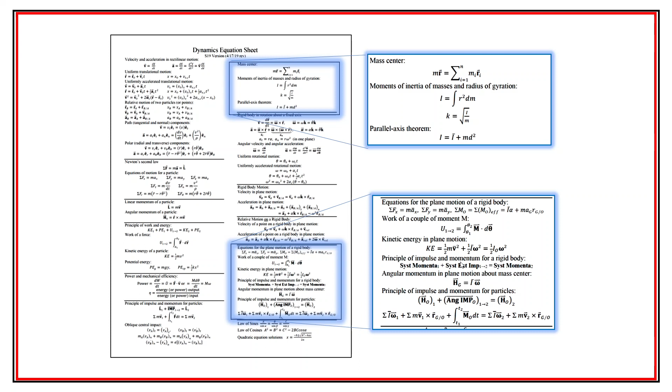And here's some representative problems. Ooh, look at this, there are a couple more. I don't know where that problem came from, but yeah, we can do that problem. From spring of 2017, spring of 2016: impulse and momentum, some more impulse and momentum, some work energy, some impulse momentum.

So we got any requests? We're taking a request today. Freebird is the answer when someone says we're taking a request. Go back to the circle. Go back to the circle. It's like one of the first questions.

Wait, so is it not cumulative, or? Well, it's kind of cumulative, to the extent that many of these things have overlap.

It's not the circle one. Do this one, not only this one. No, you're talking about the circle one? Yeah, this is not the circle one. But there's not many circles on this one. Yeah, the one with the drum rolling down, that was the circle I was talking about. But this is also, I think it's literally the next one. I'm sorry, no? Yeah, that was the circle one.

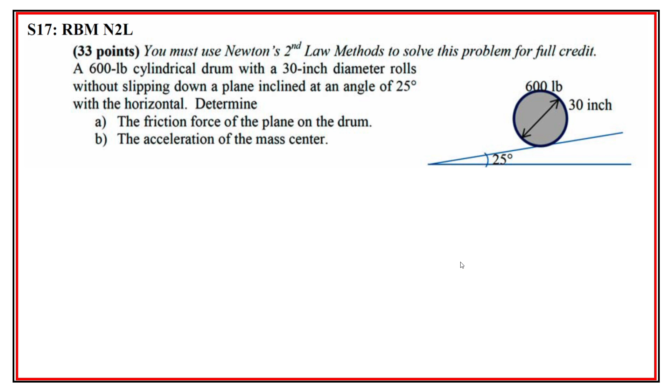Because it has stuff from, like, are you saying because these topics have stuff from everything? So some of these topics, or some of these problems, inevitably have something related to others, but it is cumulative in the sense that all of these things are related to each other. But I probably won't ask a specific question like that, except that I should also mention, and I've said this before, it's likely you'll see a rigid body acceleration problem from exam 3, a problem like that, and then might ask for ICR, just because it's something difficult and it's a measure of mastery of the topics.

So, but I'm also just providing problems I've done before, or that have been exam problems before, from Coast Guard. We actually had 5 exams there, including the final exam. Oh no, actually we might have 6, including the final exam. We did a short one, a half exam on vibrations. We had a lot of classes, almost 45 classes throughout the semester when you have 3 days a week. There's a lot more classes.

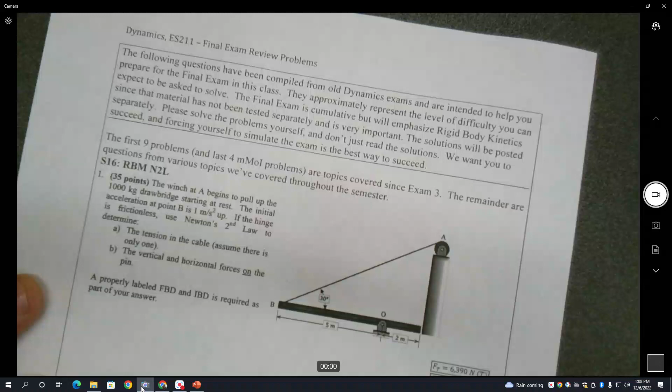Not sure if all of this is... there's a lot of words up here. Blah, blah, blah, blah, blah, blah, blah. Anybody ever read all that? When you have too many words, nobody reads it. So that's what I am with greeting cards, if somebody has too many words, I just don't read it.

So, we could start off, we got a couple of choices, because this is pinned right here.

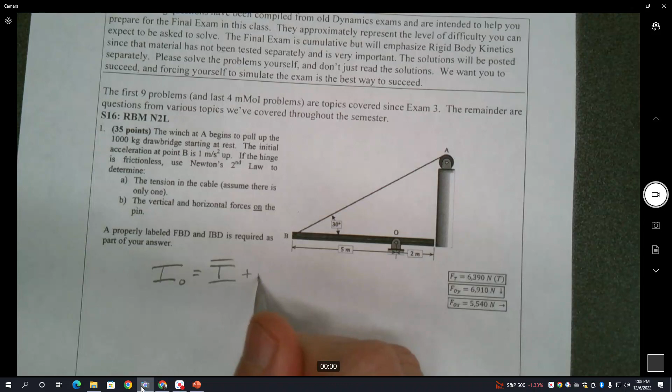So I might go for the moment of inertia about O, which would be different, I didn't bring my calculator, would be different from what the posted solution is gonna be. But it's one of our choices, so I would take the moment of inertia about O by taking the moment of inertia of the whole thing and then moving it the distance from the center of mass here to O, right? So I might go R center of mass to O squared. Could write that a bunch of different ways.

And if we have equation sheets, which if you don't happen to have one with you and you want one, I think I have a few.

Not a bad idea to grab. All right, so here we can, I'm gonna go ahead and use a long slender bar. It looks slender enough to me, but if you want to use a flat plate, you could.

But if you're around this axis right here, you end up getting the same 1/12 mb squared versus 1/12 ml squared. They all end up the same thing right there.

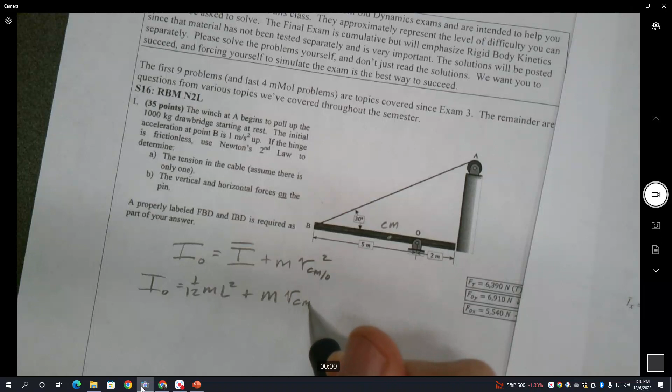1/12 ml squared plus m, and now this distance, well, let's just keep it this way for now. It's nice that we have this in SI units, so we have the total length is 7 meters, and we're going to take 1000, and now this distance we have to do a little bit of thinking here. So we have 3.5 minus 2, right? So that would be 1.5 that we're going to move the thing? Yeah, sure.

So I'll take 49 divided by 12, and I can add it to 1.5 squared. Take a shortcut, multiply by 1000, and get 6,333 kilogram meters squared.

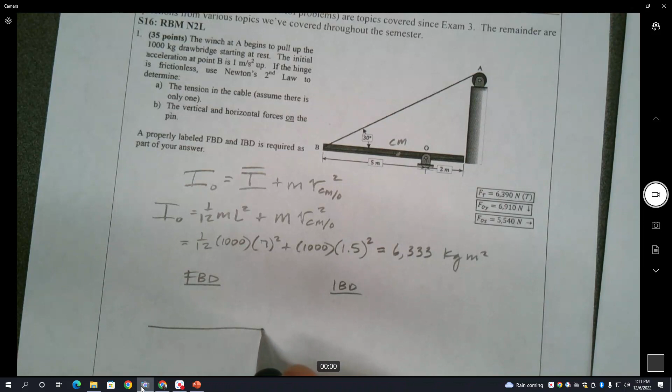And now I'll do my FBD and kinetic diagram. Let's see the forces acting on this. We're going to have the pin forces, so I'll go Rx and Ry, and then the force due to the tension. We'll have the weight of this.

I don't know, it's at 30 degrees. And then on here, I guess I'll go ahead and do this right here. We're going to have the mass times acceleration, ma, I guess it'll be the center of mass. We're also going to have the I of O times alpha.

So if I take the sum of the moments about O, in this case I can write this thing out because it's a pinned problem. I can write that. I would otherwise write the effective moments, but because it's pinned, it's a special case where we can write that. I'm going to declare counterclockwise as positive.

So I'm going to get the tension in the cable, but it's only going to be the perpendicular portion right there. So it'll be Ft, it'll be negative because it's going clockwise - which I could have probably saved myself some time by making it clockwise positive instead. So now it's going to be the sine of 30 degrees.

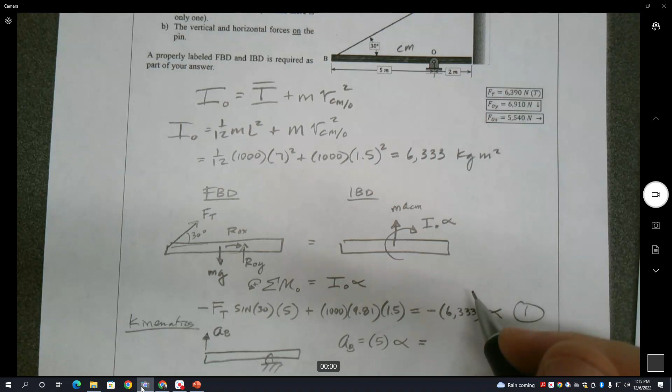Which we know we were told is 1 meter per second squared. So alpha is 0.5 or 0.2, right? No, right? Yes, 0.2. Are we looking for the velocity? We were given the acceleration, right here. What's the next one? I think it's... I was thinking it's velocity. So it's going to be radians per second squared.

While we're here, we might want to get the acceleration of the center of mass, which is just 1.5 times the alpha, or 0.2. So that's a useful thing for us to get 0.3. Yeah, 1.5 times 0.2, yeah, 0.3 meters per second squared.

Good news, now we go back up to equation 1 and find what the tension is going to be. So that should be, let's see, this comes back over here to add with this, and this goes over there. All right, so we're good with that. So we have the 6,333 times 0.2, and we're going to add to it the 1000 times 9.81 times 1.5.

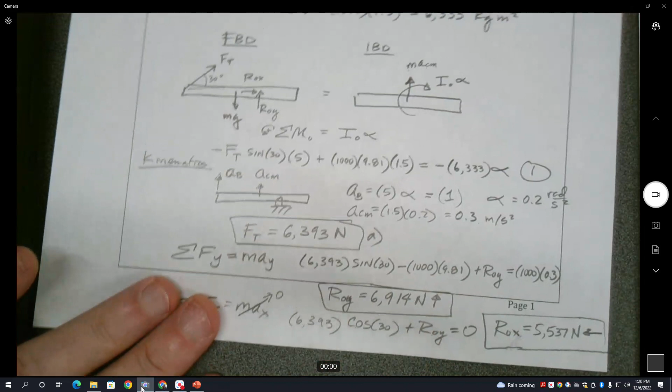Tom Brady wins too many games. We talked about that when we were in Cancun. I heard some of it. Tom Brady is the worst, I dislike it. Statistically he's pretty good. Statistically he wins too much, personally I don't like it. I liked him more when he was an underdog, then he became an overdog and I didn't like him. He just needs to retire. It's over. Yeah, apparently it's not over, he can do any damn thing he wants. He's gonna figure out a way to go to the Super Bowl. I did enjoy watching the Manning Bowl, I mean the Manning stuff, they're always fun to watch. That's the best way to watch football, and the way I want to watch it all the time, the Mannings talking over it, or just regular people talking and joking around. The Tony Romo broadcasts are always great, he's better than... I forgot his name, the other Dallas Cowboy announcer, Troy Aikman. I don't like Troy. Sorry, if this is being recorded and Troy happens to be watching Dynamics videos, I would hurt his feelings. I don't think we're gonna hurt his feelings. You don't think so? I think he could. Yeah, I think he's above it. Yeah, I agree with you.

All right, so I want to say, see this one, you alluded to this, this is the circle one. This is what I was referring to the first time around. I got you, I hear you.

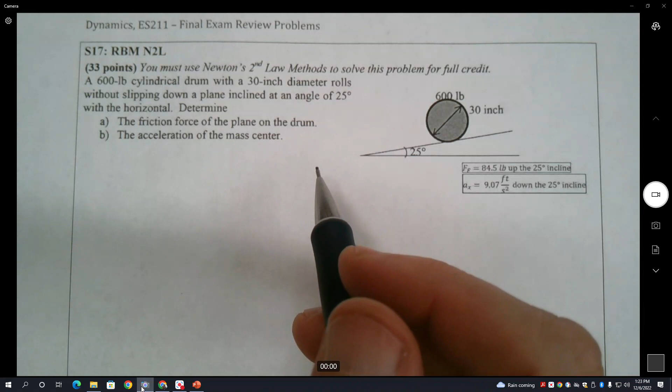I will grade your last 3 homework assignments. I recognized that, I was looking at the other day like, son of a... I thought, see, they were over to the side, and it only scrolled over so far. I was like, oh good, look, I'm ahead. No, I'm not. All right, so you must use Newton's second law. Let's see, I didn't make this problem, because mine would have been my graphic would have looked so much better. Sorry, Alicia.

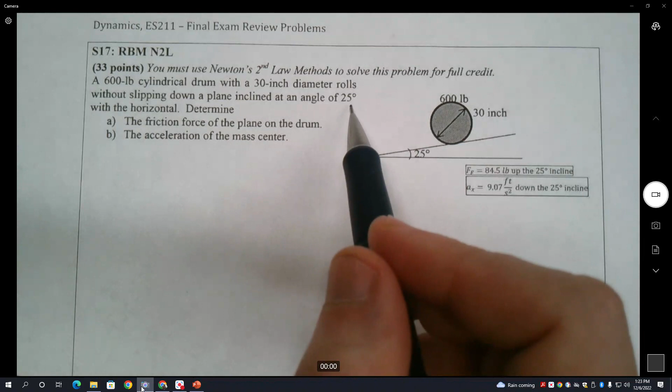Methods to solve this problem for full credit: A 600-pound cylindrical drum with a 30-inch diameter rolls without slipping down a plane inclined at 25 degrees. So the without slipping part is important. We want to determine the friction force of the plane on the drum and the acceleration of the center of mass. So first thing I'm going to do is get the moment of inertia of the drum. Did they not give us a radius of gyration? This is a cylindrical drum, right, so we need to look this up. It doesn't matter if it's a cylinder or a disc, either way we're going to have 1/2 m r squared.

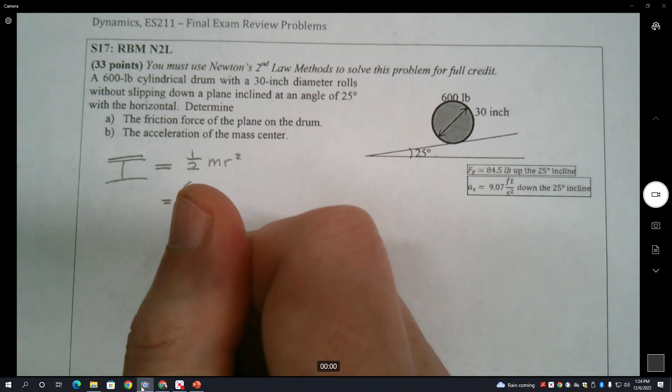And we're using our favorite US units. Oh boy. So we need 600 divided by 32.2. And the radius, this is the diameter, so we need 1/2 of it.

And need to turn it into feet. So 600, 32.2 divided by 2. And then take 15 divided by 12 and square it. And I think I get 14.56 slug feet squared.

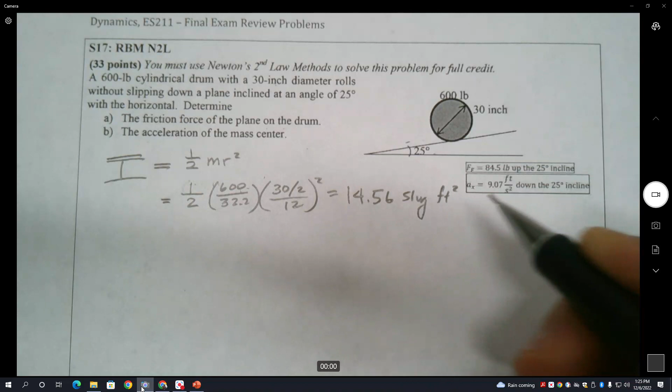Sure, somewhere. She always just leaves the things in there. It bothers me. Why'd you put it in there? I think she likes it because you can cancel the mass out. That's why she's doing that.

All right, so you see the solution, you see Dr. Garcia's solution. Oh, I get it, the mass. I like the numbers, but it's interesting that the things cancel out, but not that interesting. So, okay, I think we're ready for the FBD and IBD.

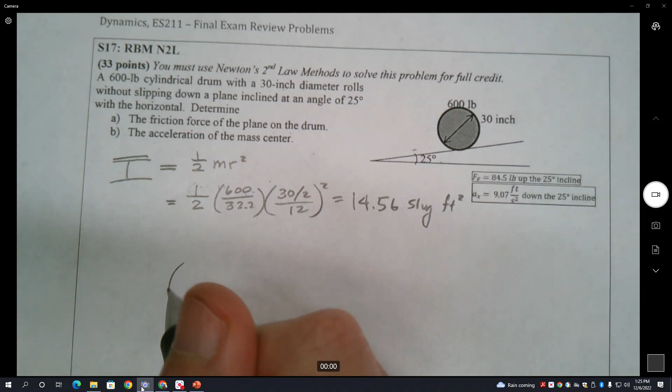It's 25 degrees. This doesn't quite look like 25 degrees. So let's see, something along those lines right there. So the weight's going to be acting downwards, so there's the weight.

The normal force is going to be in this direction. The friction force now, you have to ask the question: which way is it going to go? Is it going to go up the hill or down the hill? What do you think? Probably up. The friction is going to go up.

So yeah, okay, I hear what you're saying. So there, I agree, the friction force will be that way.

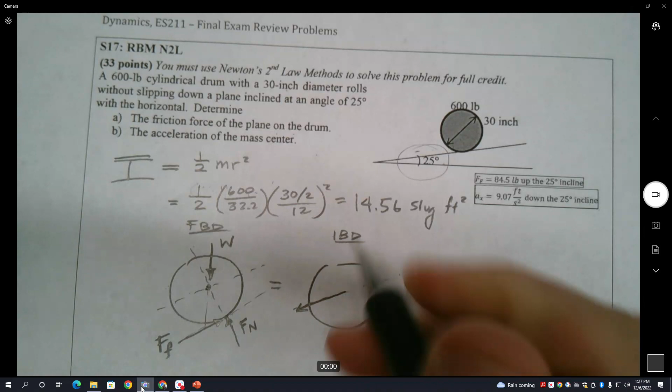You could think of the friction force as the thing that's making the drum rotate. If you took the moment about this spot right here, the normal force and the weight would have no influence on that drum. So it would have to be the friction force that's making it rotate down that way. So we're going to say it can only accelerate translationally down the slope that way, so we're going to have mass times acceleration there.

And we know that it's rolling as well, so we're going to have I alpha about the center.

So let's see, determine the friction force on the plane, the acceleration of the center of mass. I think what I want to do here is also take an x prime that way and a y prime that way, and notice that's moving there, so we can make the weight only in here.

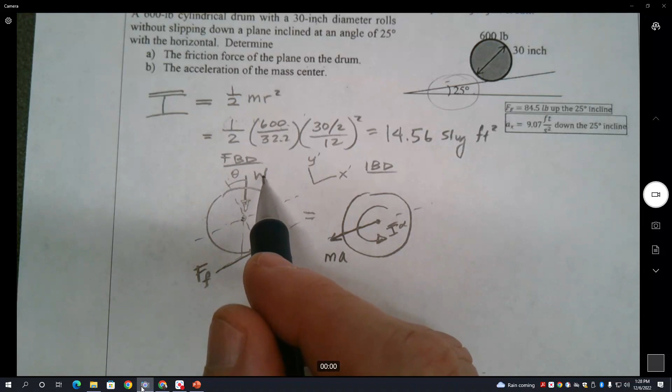We don't need the normal force for anything, so there's no reason to do anything in the y prime direction. Make sure that you recognize that this right here is not true in this case because it's without slipping.

This would only be true if it were slipping, right? So don't fall into that trap of turning your brain off and saying, hey, I recognize that variable. One hint is that it didn't include the coefficient of friction. If they'd been just a little meaner, it would have included the coefficient of friction to try to trick you. But then it wouldn't have said without slipping.

I agree with you, but some people don't read, like me, a lot of times. I don't like reading, there's too many words. I'm an engineer, you should read the greeting card though. That's frightening to do, especially if it rhymes, I'm not a fan of poetry. My daughter's trying to convince me. You don't even like Edgar Allan Poe? Not so much, I like a haiku, it's short. I really hate haikus. Haikus are nice, I don't get them. They're cool but they're kind of dumb. You're kind of dumb. We're digressing, are we? Get to it, I'm not here for your haiku critiques. I got you, we can talk about this later, a long conversation.

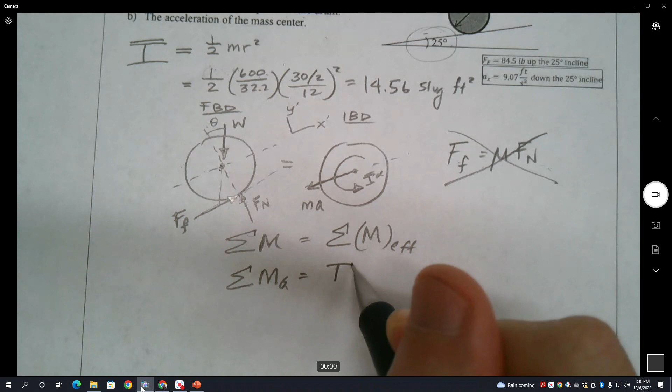So anyway, if we take the moment about the center of gravity, this was in translation and rotation, so we can't do it about the pinned type of thing. Most of the time we would do the sum of the moments about some point equal to the sum of the effective moments, but if we do it about the center of gravity, we're always going to be okay. So we can take it about G, equal to I alpha. So that's okay to say.

So looking at this, we're also going to take counterclockwise as positive. So we take this unknown friction force that we have right here, going in a positive direction, and we'll take the radius, so that's 30 divided by 2 divided by 12. There's nothing on the left-hand side here because we're taking moments about G. And so this is going through the center, so in terms of the effective moments, it doesn't do anything.

So what we're left with is I alpha, and we don't yet know alpha, so it's 14.56 alpha. We have to put a pin in this one for the time being because we don't know it. So we'll call that equation 1.

Then we take the sum of the forces in the x prime direction equal to mass times acceleration in the x prime direction. The forces in the x direction, we'll call positive coming up right here. We have this friction force, which we still don't know. Fn goes away, it's not there. But we do have a negative weight, and it's going to be the weight of this thing, which is 600 pounds, times the sine of 25 degrees.

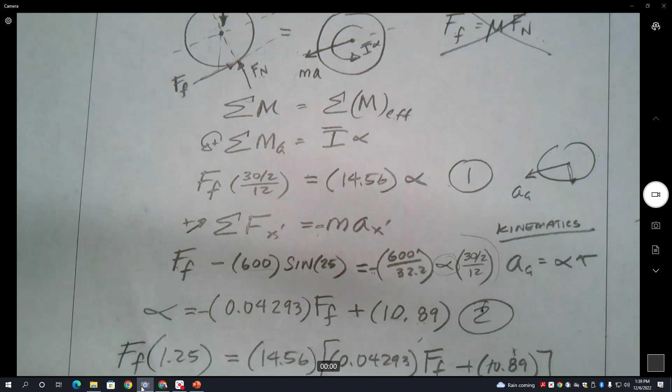84.56 pounds, which is what, oh, I'm sorry, slide. And then from this, we could go back into, well, we could go to this equation, I guess, right here. Yeah, that's as easy as anything.

To go, alpha is equal to 0.04293 times our 84.56, plus 10.89. Bless you, thank you. 10.89, so we get, I hope that's right.

I got the same answers, but I did it differently. Okay, good, I got very close to the same answers. It's easy to get a little off, wait, slow. My alpha actually didn't, but I got 84.53 and my alpha was 7.257. Yeah, you're right, you have the right answer.

So let me see what I did wrong here. 0.04, friction's right, 293 times my 8. Oh, you know what, one was negative. That's why, I forgot mine was negative. So that should be negative, and then with the 10.89, then yeah, negative. Should get

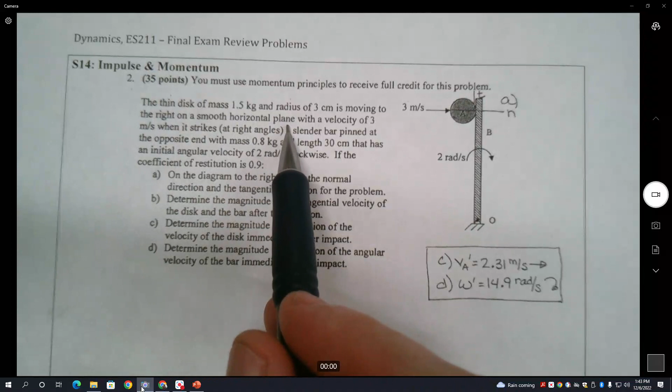So we're going to have a thin disk moving to the right on a smooth horizontal plane, right, so this is flat. 3 meters per second to the right, when it strikes at right angles a slender bar pinned at the opposite end of mass 0.8 kilograms with a length of 30 centimeters. It has initial angular velocity.

Ooh, it's going clockwise, interesting. So they magically hit each other at just the right position. I was almost thinking it would be swatting that way at it, but it's actually swatting this way. If the coefficient of restitution is 0.9, it starts giving us directions here, but mostly on the diagrams.

Show the normal and tangential components, determine the magnitude of the tangential velocity of the disk and the bar after the collision, determine the magnitude and direction of the velocity of the disk immediately after the impact, and then determine the magnitude and direction of the angular velocity of the bar immediately after impact. So,

What is she saying here? Determine the magnitude of the tangential. That right there is a trick problem. They're 0, because the tangential direction is that way, and there wasn't any tangential before, so there isn't going to be any tangential after. Tricky.

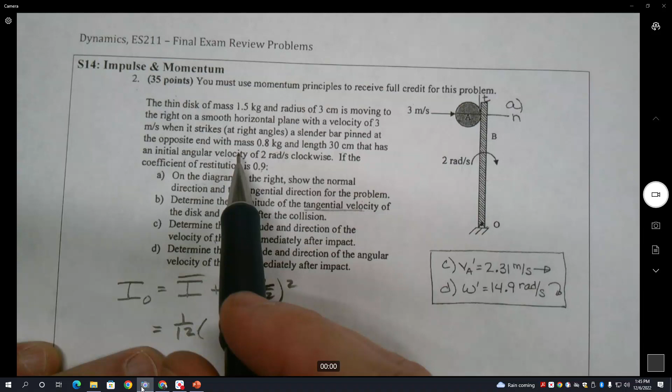A slender bar pinned at the opposite end is 0.8 kilograms, and the length is 30 centimeters.

30 centimeters. Centimeters bother the hell out of me. I can get my head around millimeters, but the centimeters. So that 30 centimeters is 0.3 meters. I guess it doesn't bother me now as much. So there's a little mental gap when it comes to that.

0.3 divided by 2. So this is about the center of the mass right here, and we're moving it half the length, so it's right there.

0.3 squared times 12 divided, and then 0.15 squared times 0.8, add them together. So I get that this is 0.02400 kilogram meters squared.

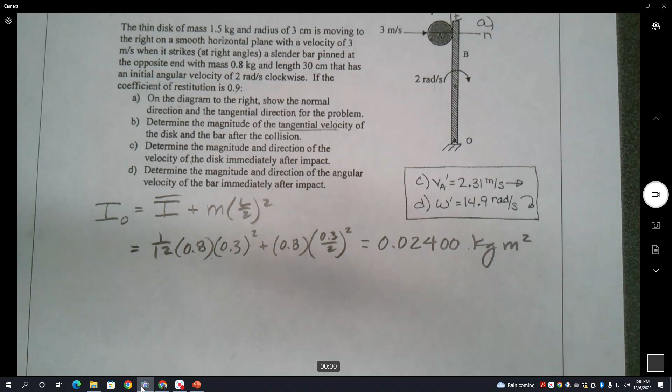That's just little initial stuff. We're going to want to know the velocity, the initial velocity of a point that we will label. Let's just, even though this whole thing is called B, let's name that point B. That's the point where the collision happens right there. So we'll find the velocity of B1, and we're assuming that it's right there at the tip, even though there's a little spot right there.

I always dislike that part, but we're going to take omega 1 and do L times it. So that's going to be 2 radians per second times 0.3. Ooh, what happened there? Ooh, I see what I did. She's got so much stuff written on this page, it's hard to follow it. I'm just going to believe in myself. It's going to be 0.6 meters per second. I'm going to need that in a little bit.

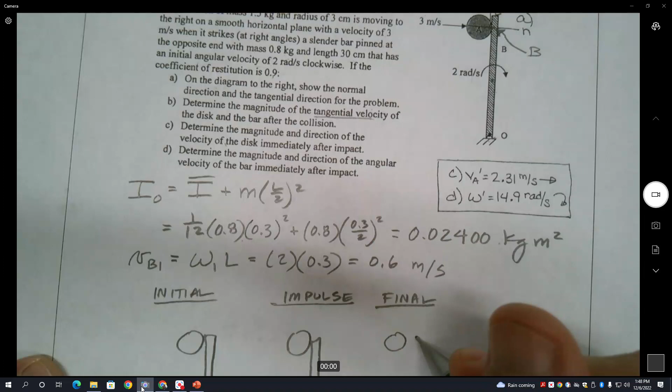So we will write out now the 3 diagrams here: initial, impulse, and final. They're kind of putting close to each other, didn't I? I don't really need the impulse. Gonna draw them a little bit separate from each other, even though they're not.

And so here we go. We have our M times VA1, I-O omega 1. We're gonna have these crash, kaboom. Also have these going on right there, but they're gonna cancel each other out.

Also, we could write out these right here in R's. There's nothing in the y direction, so there really wouldn't be any right there. But there would be here in the x, there could potentially be some in the x. So that's the reason why we're going to take the angular momentum about this point, about that point, to avoid this. So after this, I'm going to go ahead and assume that it's going to continue in this direction.

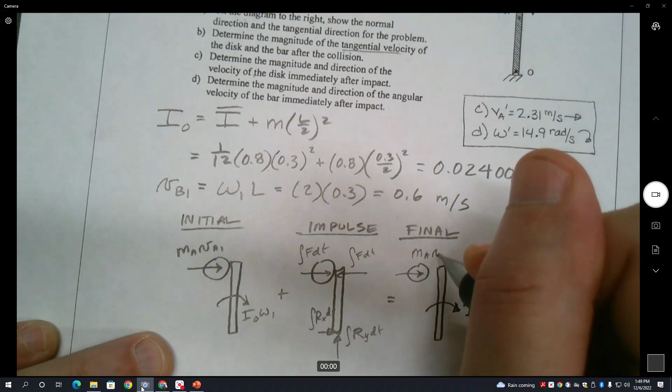So almost everybody's going to be negative here, but we'll keep up with it. So it's going to be negative M times VA1, but now times the length of the thing, and negative I-O omega 1. And then everybody here cancels out. So it's going to be equal to, and we're going to assume that it keeps on going, so we're going to go negative M times VA2 times L, and then minus I-O omega 2.

So we put in a lot of numbers here. 1.5 is this mass. Initial, we actually even included the radius. It doesn't need, we don't think we need the radius for anything. Jeez, hope not, I don't think so. Velocity of this, horizontal velocity, 3 meters per second, and the length is 0.3. I is, hopefully did that right, 0.024.

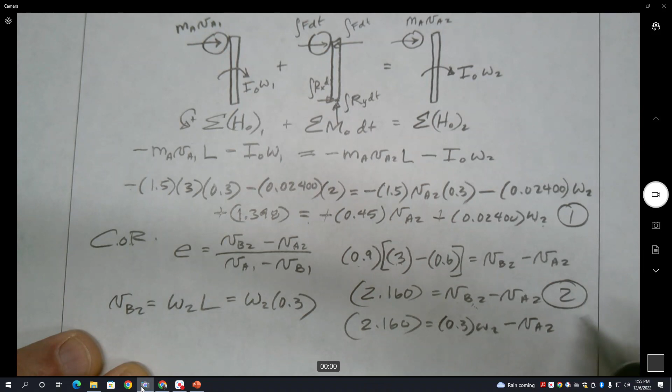So 2.16 is equal to 0.3 omega 2 minus VA2. I could have called this equation 3, maybe. Now this is equation 4. We can stop numbering equations now.

Now we just combine this equation with the one up above. Since I have VA2 isolated already, I'll substitute into there and solve for that. So I got...

1.398 is equal to 0.45 times, and that's going to make this 0.3 omega 2, minus 2.160, plus 0.02400 omega 2. And now I can solve for omega 2.

Even though I don't want to. So let's see, 1.398, and I have 0.45 times my 2.160, and that's going to add onto there. And then I'm going to have 0.45 times 0.3, and that's going to add to my 0.024. And then I can divide, and hopefully I get 14.91 radians per second, and that, according to this, is the correct answer.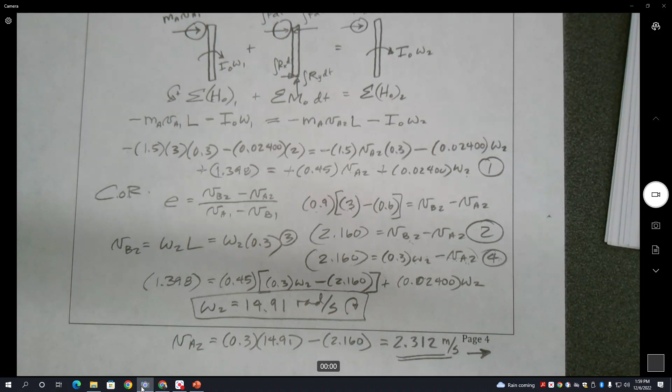We're taking requests. No free beer though, and no Mustang Sally either. Won't play Mustang Sally. Just won't play. Play That Funky Music, white boy - just will not play. I Will Survive - won't do it, never playing that song ever again. Yeah, you don't even know the song. I know the song. Why won't you play it again? I just played it too many times. It's even started to get in my head. Get out of my head, don't want to hear it.

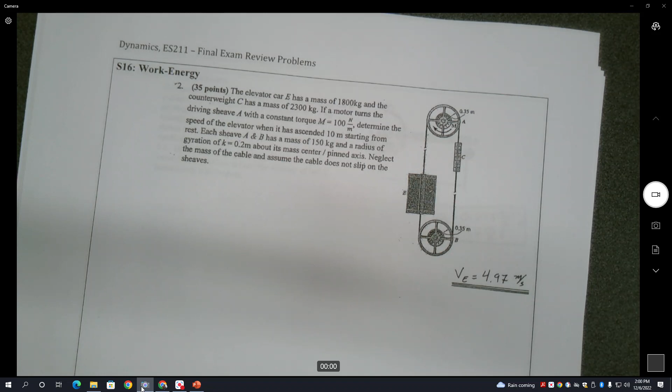Oh, this one that I wrote is too complicated. Yeah, I don't want to do that. You don't like that one? I don't like that. Well, look at that - he's like, maybe an ICR one. Yeah, I like... I don't know. Oh boy. This one also looks hard. We might have to invent one. Inventing a problem will work. We just pick one out of the book.

You're gonna have the monkey scale the Empire State Building at 133 miles an hour. Yeah, that's a dangerous thing to do. Don't wanna. We could start causing all kinds of problems with large monkeys climbing buildings. Oh, you're really gonna create a problem. Really good at creating problems.

That was actually, I think, on my second grade report card: really great at creating problems. I was uniformly despised by a number of my teachers. I've never had a teacher talk about how bad of a student they were so much. You always say how you were such a bad student - I don't believe you, you're a teacher now. I have my grade cards.

Not to go dark, but my mother passed away several years ago. My little brother and I were going through the stuff, but she kept my grade cards. I was a terrible kid, probably good for a laugh every now and then. I tried to inspire my son by showing how poorly I did at one point. Did it backfire? Yeah, totally. He's like, if you did that, why can't I do that?

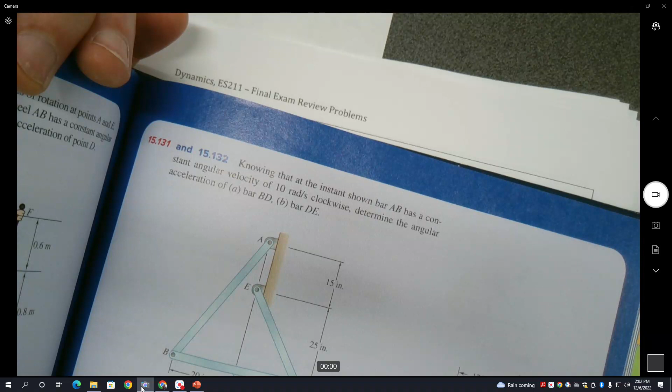Okay, so look at this one right here, I'm trying to figure out where the ICR is. I think maybe it might be... no, okay, we can do this one, right? I have no idea how to do that. Do the ICR of this one - this guy right here? Well, I think it's actually going to be a strange spot here because it's going to be the intersection of these two things. So I think the ICR is actually right there.

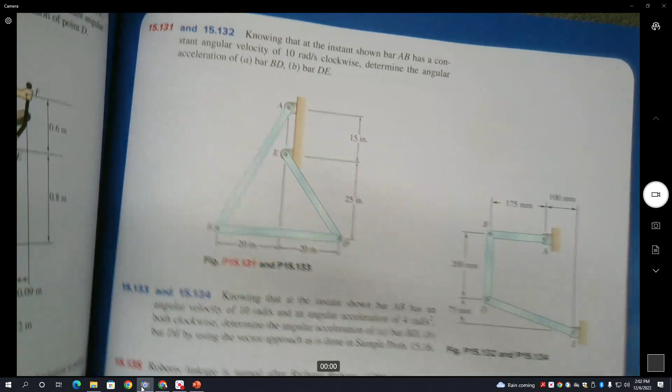How about we do the next problem so it's not so... you do this one? Is that better? This one's very similar to one we've done before, but that's okay. We can do that. And maybe we should find what the acceleration is of the thing too - the acceleration can be quite hard to find for some of these. They're giving me the acceleration, but I thought this was in the section that was whatever. Okay, so let's get a fresh piece of paper - good place to start.

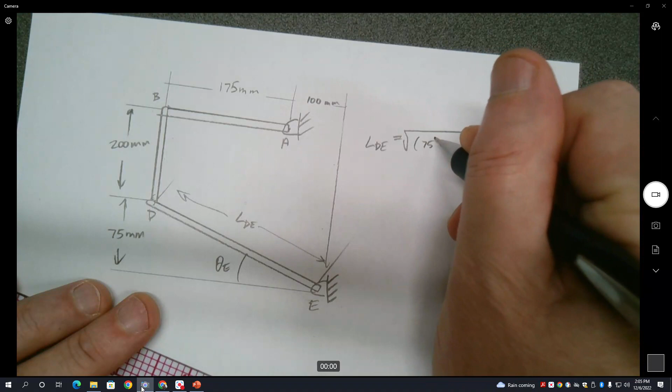So this is E, D - spells Ed. So other things that you might want to find here right away - I'm going to call this LDE, and I'll call this theta E. So LDE is the square root of 75 squared plus 275 squared, equals... 285 millimeters.

And then theta E is inverse tan of 75 over 275, which gives 15.26.

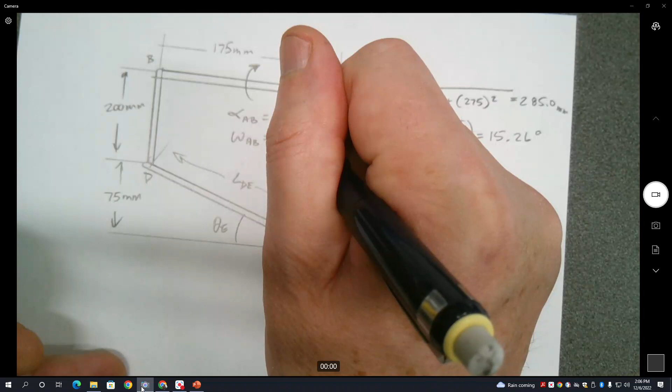The information they provided says that the instant shown, AB has an angular velocity of 10 radians per second, and angular acceleration, both clockwise. So that would be this way right there. So alpha AB - well, I did alpha first for some reason. The omega first is the 10 radians per second. This is the 4 radians per second squared.

The angular velocity is usually a pretty easy one, it's just the ICR. The best way to approach it when you see a 4-bar is to just extend the lines - extend the legs. Of course this one runs off the page. You can see what these are going to be, so maybe we draw a little smaller version of this thing, so we get a sense of what's happening.

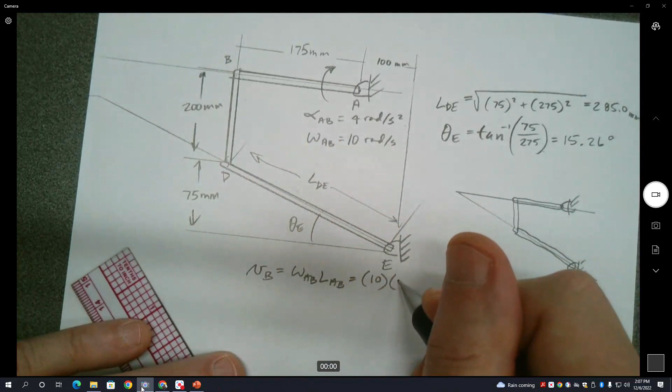So start out finding the velocity of B - it's simply going to be omega AB times the length AB. So 10 times 175. I'll keep everything in millimeters because why not.

I'm so confused, why'd you draw that thing on the side? Because I'm going to want to get these distances soon - to do the ICR, because I couldn't get it, I couldn't do it over here because I ran off the page. I just didn't know why you needed the distances. I don't necessarily think in a linear fashion a lot of times, so I just jumped to something I knew I wanted to know. And then as soon as I got here, I recognized, oh, I actually need to do this first, or at least for my comfort level, want to get this velocity out of the way. So 1,750 millimeters per second.

So I know that velocity is going to be up that direction right there. Isn't it 1750? Yeah, that will work. I kind of want to do the distance - I need this distance right there is what I'm going to need here. So I did need this velocity.

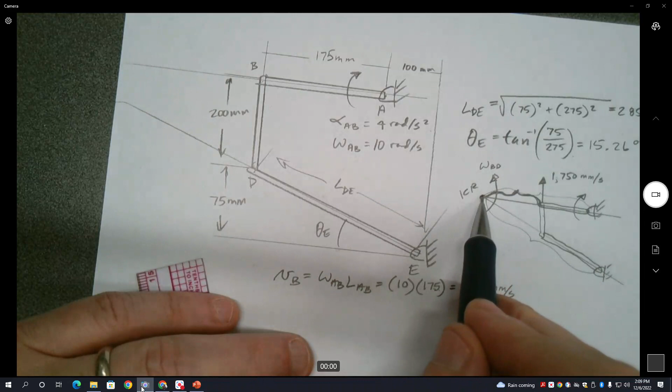But I could see from my ICR that my angular velocity of this guy right here, called BD, is going to be that direction. Which is the ICR? This is the ICR right here. And this right here is going to be R, call it B with respect to ICR.

And this distance is going to be R D with respect to ICR. This becomes an easier ICR problem because that's a right triangle right there, and this angle is going to be the same as this angle right here. So we can find that R B with respect to ICR.

This would be the rise, right? And this is the run. So we want to divide the rise by the tangent to get the run, is that correct? We okay with that? Alright, because I'm not, but alright.

So I take the length of BD divided by the tangent of theta E, and I will get 200 divided by the tangent of 15.26, so I get 733.3 millimeters.

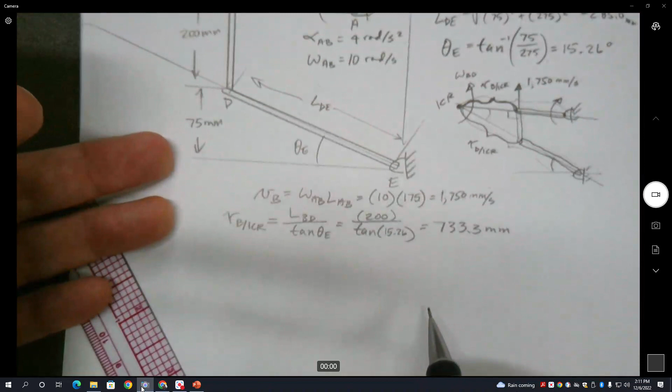So I can find the angular velocity of BD by taking VB and dividing it by RB with respect to ICR. So 1,750 divided by 733.3, or 2.386 radians per second.

And now we want to get the velocity at D. We can see that it's going to be that direction right here, VD, going in that direction. So we need the R D with respect to ICR. We could do it a couple different ways, but we have the side opposite right here, so we'll divide - this is the hypotenuse of that. So we'll take LBD and divide it by the sine of theta E.

Is there a reason you're keeping everything in millimeters as we go? I don't know, just didn't feel like the decimal places, but if it were a kinetics problem, we would want to be in meters per second squared, that kind of thing. I was only asking because I was wondering if it affects the radian values. It won't, because everything would be scaled. Everything's proportional.

I think - can you check the original problem for this one? The original problem was problem 15,134, and I believe this is the 12th edition, if you wanted to see quickly.

So, it's not wrong to think like that. Yeah, I had my totally off topic.

The drummer in my band, last night we had band practice, and his mother and father got scammed, got a really effective phone scam. They were able to stop the money, they were able to go to the FedEx station, had the cops go there and stop the money that they had transferred. But they got this phone call that was supposedly from their grandson, my drummer's son.

He said, I just had a car accident. I borrowed a buddy's car down in New Jersey, and I drank a little bit of wine. I was driving his car, and we hit a pregnant woman, and I'm in jail, and here's my attorney. I hurt my mouth, that's why I sound weird, and here's my public defender, and they're saying we need to send this money.

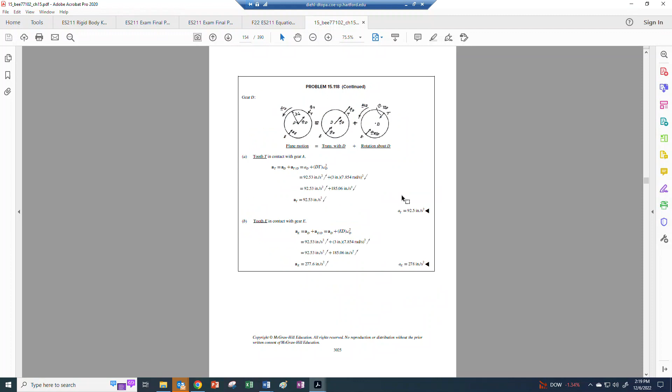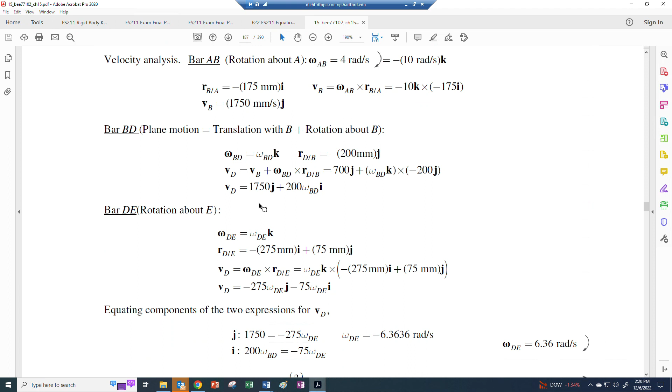Yeah, so they did it by way of vectors, which can look a lot more compact, but let's see if we got the 2 point. This sounds familiar. You got 2.386. Yeah, and then they started doing the acceleration analysis. So right here was them doing it with vector math and going through there, and then they go through the acceleration analysis.

All right, so let's proceed with another type of problem. We have a work it, we could look through the book for some, or we could go through some of the old exam stuff. Whatever floats your boat, as they say.

How many questions in the final, 4? It usually ends up being 4. Here's one we could do later on for an ICR and acceleration one. Do work energy. Okay, do one that you think is going to be similar to one.

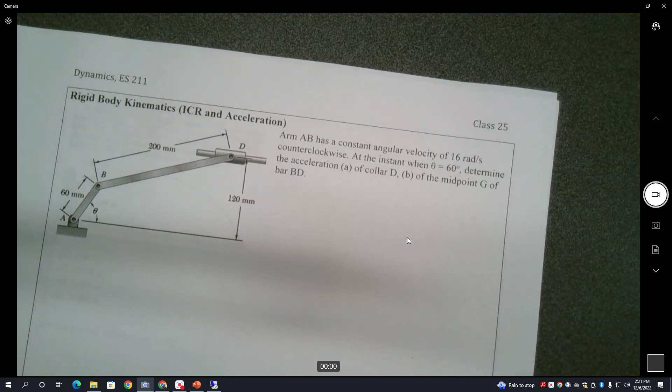Funny man, come on. Isn't that how we all want it to be? Yes. I understand, I got the idea.

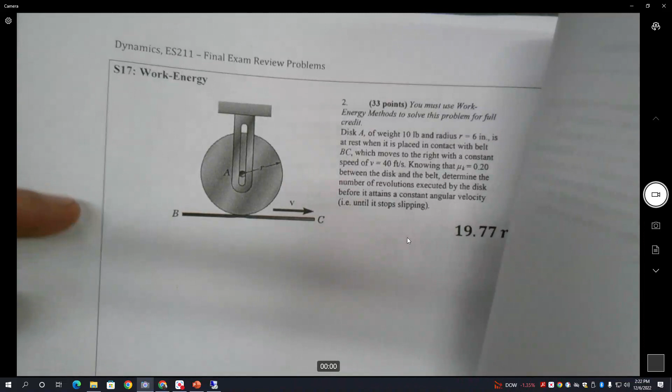It's not true. That ball one doesn't look that bad. This one? Not the one before it. That one looks bad. That one looks bad? But it's not really. I mean, let's see, it's work energy, right?

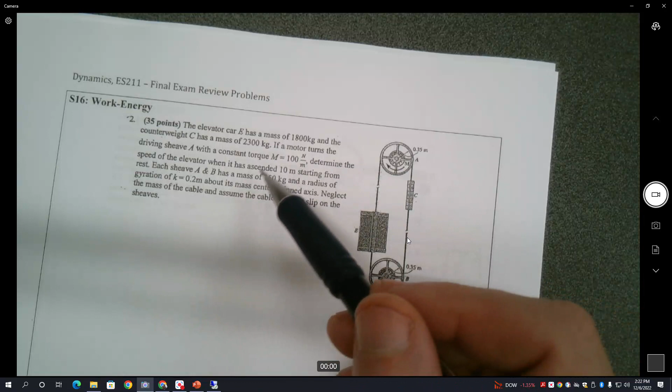So the elevator car E has a mass of 1,800 kilograms and a counterweight that's surprisingly larger compared, I guess there's people have to fit in that, right, so 2,300 kilograms. If the motor turns the driving sheave, so there's a motor up here, has a moment of 100 newtons per meter. See, I think this is an error right there, that's an error, that should be a newton meter if it's a torque, not newton per meter. And that would be like a spring constant would be a newton per meter.

Determine the speed of the elevator when it has ascended 10 meters starting from rest. Each sheave, A and B, has a mass of 150 kilograms and a radius of gyration of 0.2 meters about its center of mass, about its pinned axis. Neglect the mass of the cable and assume the cable does not slip on the sheaves.

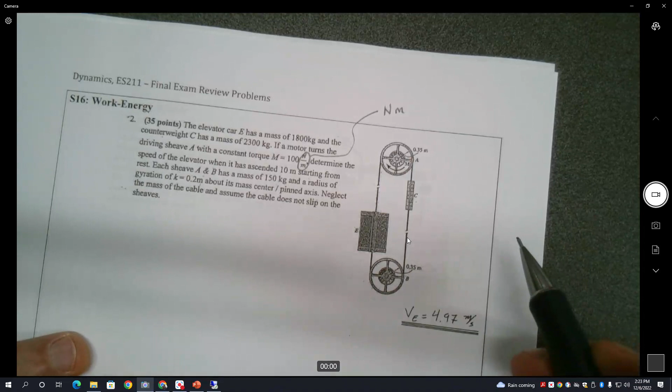So a number of things to look for here to start with, all right. So does it start from rest? If the motor turns, driving the sheave, when it has ascended 10 meters.

So my first thought was, I recognized that this is a work energy problem, right, or we were told to do it as work energy. We could have done it in other ways, but I recognized we were told it was work energy, and then I saw that there was a moment and that this thing was translated. What do we know about when it goes to work energy, rigid body motion, when it comes to a moment?

That was the first thing that came to my mind. Is this an external force? Yeah, it's external, being applied to it, so there's work being added to it. So what I want to find, when they told me that they translated this amount, I'm going to figure out how many radians then did it turn, because of that external work that's being added. Does that make sense? That's where my thought process went right away. Or could you have thought that? Would that be the thing that would trigger you?

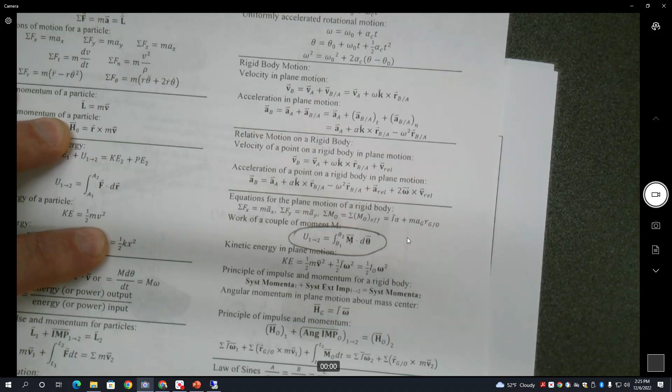Just remember that we're doing rigid bodies, that's the category of stuff we're working on, and we're talking work energy. When it comes to work energy, that's one of the differences. We had force times distance for work before, now we have moment times angular displacement. They're kind of the same thing.

Maybe I want to go delta theta, maybe is the first thing I want to say. How many radians does this guy turn around? I guess I'll go A right in there. What's going to be the distance divided by the radius? So if he's moving 10 meters and his radius is 0.35, 10 divided by 0.35, we end up with 28.57 radians.

We don't know how many revolutions that is, and we don't care. But we're going to want to multiply that by that moment right there, and that's the amount of external work that goes on. Other preliminary information.

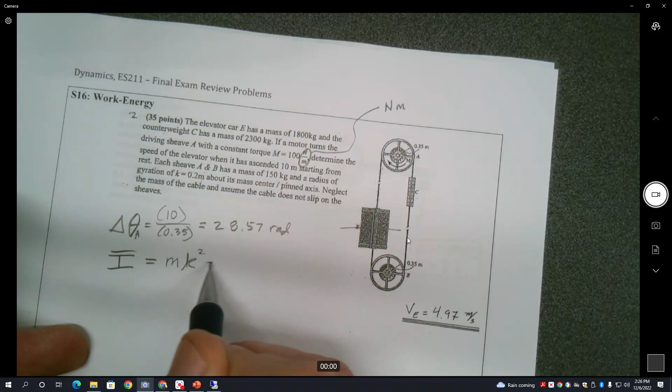We need to invent more letters, like use Cyrillic or something, I don't know, what do they use? Symbols, Coptic, what is it? What is the symbol? What is the Russian alphabet called? What are those letters called? Why Russian alphabet, I don't know, use that symbol, I just was picking some. You can use Arabic, I don't care, I just want to try to- we need more characters, we don't have enough characters. Oh, they used K right there, see? It'd be confusing, it's utterly confusing.

So 0.2 squared. It's not so bad when there's not a spring in the problem, but when there's a spring in it- yeah, like there is one of the problems under the review that has a spring in it, so it's crazy, it's nuts.

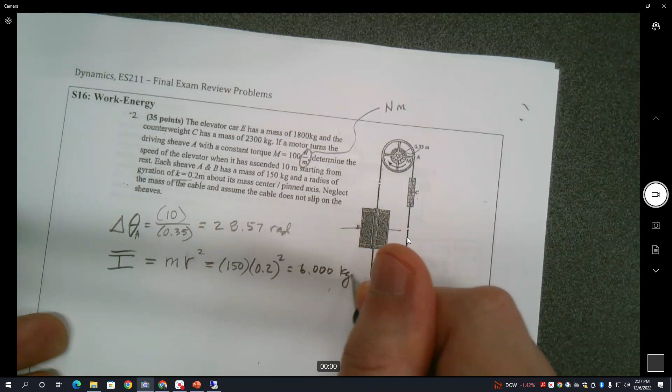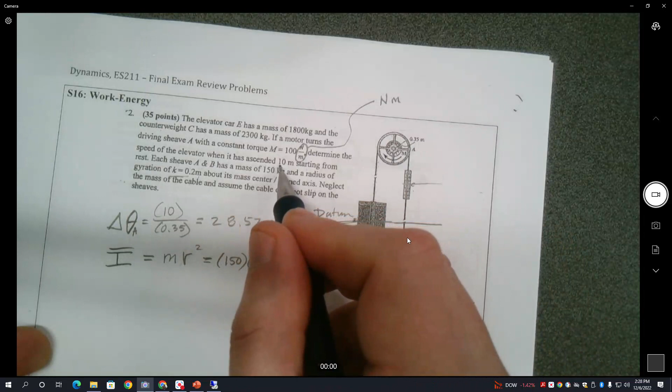Okay, so when we go to do this, we also want to start a datum somewhere. And it's unfortunate there's no pulley ratio right here, so we can say the datum is the lowest spot right here. So when this goes up, ascending 10 meters, this comes down 10 meters.

So when we write out, I forget which one I do first. Now that I'm at the end of the semester, my brain's like all in a fog. KE1 first, is that what I've been doing usually? Yeah. What do they call it in the book?

It's not the letters, there's other books that do that, and there's also some old books that do that. That's one of the reasons they didn't make that decision, but what can I say? I've seen other books that use it this way, and it was just not enough letters.

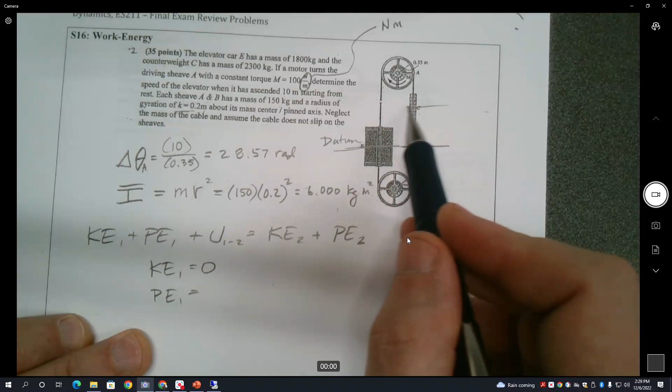So the kinetic energy at the beginning, KE1, is equal to 0 because it starts from rest. PE1, I'm going to go ahead and choose that's going to be the counterweight right there. So it's mg, and we'll call it delta y. So it's m, I guess they call that c. There's a c right there. So the counterweight is 2,300, and gravity is 9.81, and it's going to move 10 meters.

23... so it's a big number. 225,630 Newton meters. I just, as I'm coming through here. Yeah.

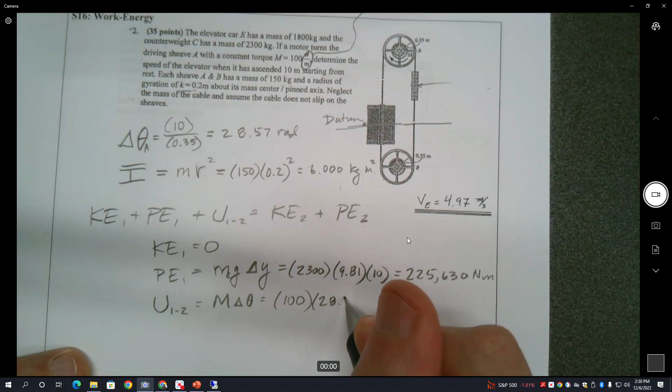The work that's being done between here is going to be the moment times delta theta, and the moment is 100, and we said that it was 28.57, and is that going to be 2,857? Yeah, thank you.

2,857 Newton meters. And then the kinetic energy at state 2 is going to be made up of 4 parts. Fortunately, there's 2 of this, 2 of them are the same, with the angular velocity. So we're going to have 1/2 I omega squared, and it's going to be times 2, because there's 2 of them, plus 1/2 m_e v_e2 squared, plus 1/2 m_c v_c2 squared.

So I need to get rid of that. Well, I'll leave it.

And by the way, while we're here, we could also recognize that VE2 and VC2 are equal to each other, and also that omega is equal to either one, VE divided by that radius, 0.35.

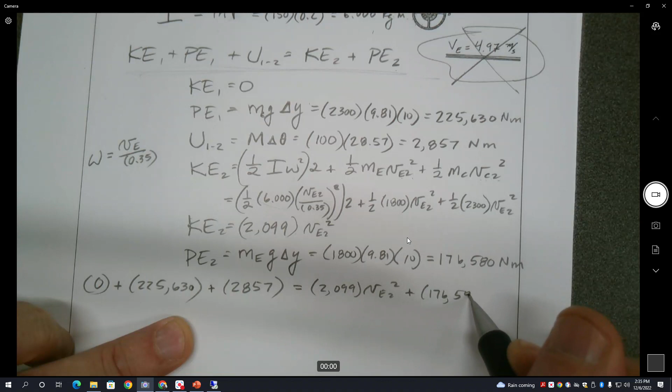So 225,630 plus 2,857 minus, and then checking, divide, square root, and we get 4.973 meters per second. Yay, it's the same, it matches.

See, not so bad after you do it.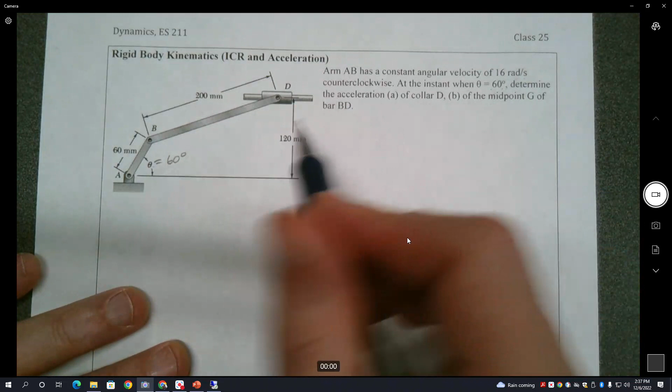So we have this arm AB, has an angular velocity of 16 radians per second counterclockwise. At the instant shown, it's at 60 degrees. We're going to determine the acceleration of the collar and of the midpoint of this one right here, which just seems a little excessive, but that's okay.

I mean, the reason why we would want to do it now, we recognize, is that if we wanted to do the kinetics, that would be an important thing for us, but it just seems a little extra. First thing we need to do though is velocity analysis, so we're going to use ICR for that.

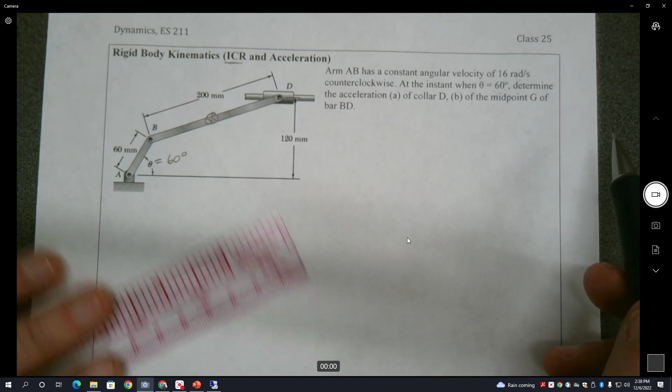And we can project the ICR rather quickly. Anybody want to hazard a guess of where it's located? Above, below, to the right, to the left? It's gonna be below. You just draw it from the pinpoint, you draw it straight out, and then from that, you draw it to the left. So the ICR is like, near where 3.5 would be.

Okay, well, because the slider can only go left or right, it's got to go on there. You have to remember the line that you want to do has to be perpendicular to the velocity. The velocity is going to be in this direction, right there, right? So the line that the ICR has to be has to be aligned with this, and the velocity here has to be in that direction. So the line perpendicular, the ICR is up there.

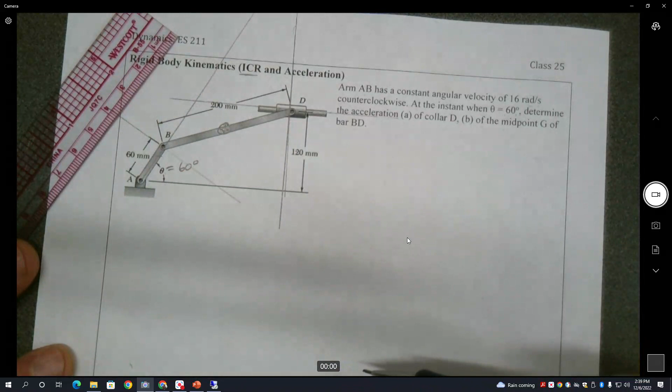Does that make sense? Here's the line of the velocity. The line of velocity for point B is the side of that line, yes. So then you can draw a line perpendicular from that, where that meets the line perpendicular to the other velocity, which is D's velocity, that's the ICR. So it's gonna be straight up like that right there, and then this one's gonna be in line.

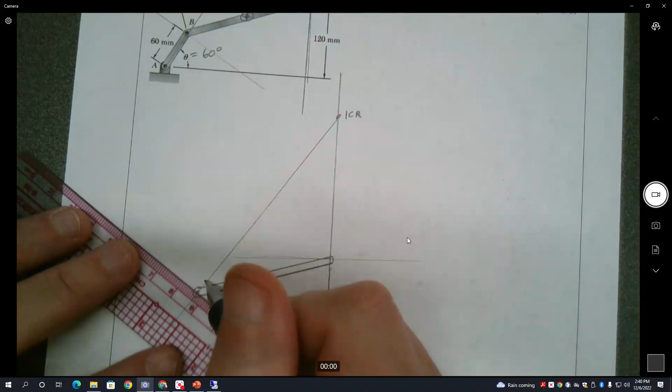They said it was going counterclockwise, right? So omega AB is going that way, so he's going to have a velocity that way - there's the velocity of B. So we're going to have omega BD coming that way. And therefore, the velocity of this guy, which we don't really care about in this problem since they didn't ask for it, VD is right there.

We have to get a little bit of geometry up here that they didn't give us. They gave us enough information, but it was just barely enough. It would have been nice to know this angle right here, but they didn't bother to give it to us. But we can find it.

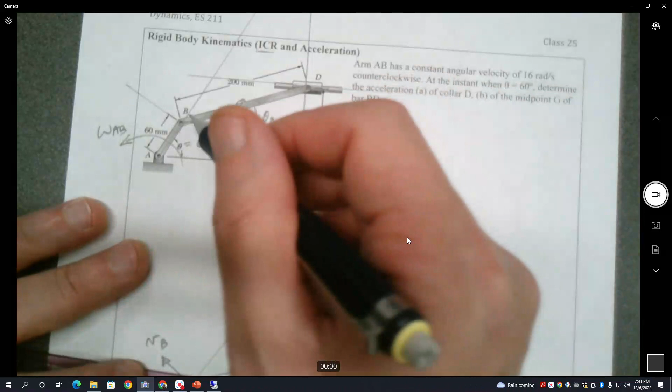I might call that theta B, because it's the corner would be. We don't know this length, but we know the hypotenuse of this. So let's take the inverse sine, and the rise of this, opposite from this is going to be 120, and we're going to subtract out 60 times the sine of 60, and then divide it by 200.

Told you it would have been nice though. So that's 19.89 degrees.

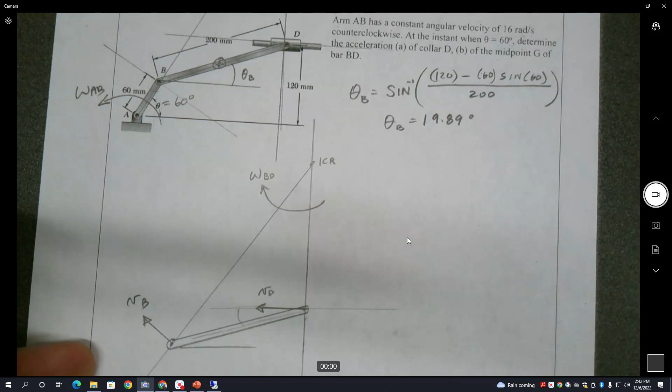So that's that angle right here, so that's going to be the same angle as right there. And we need this rB with respect to ICR. I'm tempted to do it in a different way. But, well, we know that this angle right here has to be 30 degrees, right? Yeah. Because this one with horizontal is 60 degrees. Is that relevant?

Well, I was about to say that we could get this angle by subtracting out that angle right there. This is the 19.89 degrees. And now we have that angle. This is going to be 60 minus 19.89 degrees, so it ends up being 40.11 degrees. And if we know that, we can find this angle.

90 plus 19.9 - that's true, right? Yeah, you're right, we could also do that. 90 plus 19.89. And we need that for... was it 90? I don't need to do that, right? 19.89, I can do that in my head, right? I couldn't. So 109.9, or 109.89. Then another sig fig won't hurt, especially when the first digit is 1.

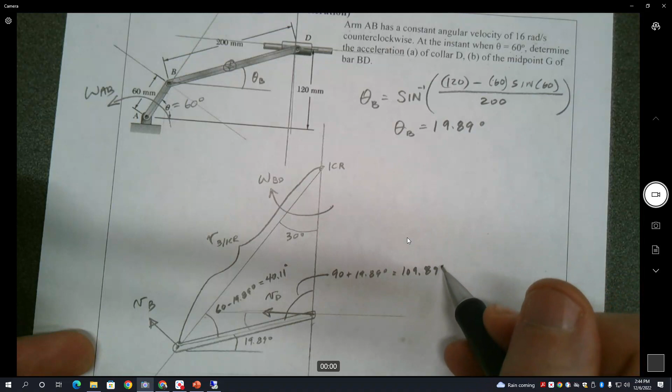So we do the law of sines to find that. We take RB with respect to ICR, and then the sine of 109.89 equals this length right here, given as 200, divided by the sine of 30. So RB with respect to ICR, take the sine of that, multiply it by 200, take the sine of 30, divide it, so we get 376.1 millimeters.

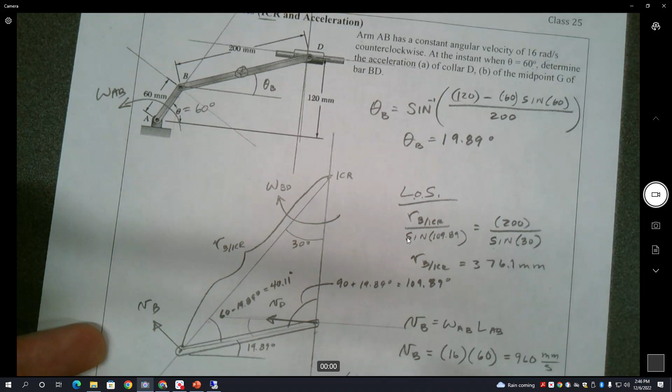And we hadn't got velocity of B yet, so the velocity of B is the angular velocity of AB times the length of AB, which is 16 times 60, so 960 millimeters per second. So the angular velocity of BD is going to be equal to VB divided by RB with respect to ICR.

Or 2.552 radians per second. Whoops. We don't need the velocity at D. It doesn't really help with anything because this question is about the acceleration. We needed this because of the acceleration problem.

Another piece of information we should get before we proceed to the main feature is we have this velocity of B. We also, even though this is rotating at a constant angular velocity, or at least we're assuming it did - I don't know if it said, yeah, no, it did say a constant angular velocity - we have to remember that we still have this acceleration at B is entirely the acceleration of B with respect to A in the normal direction, or omega AB squared times L AB. So 16 squared times 60.

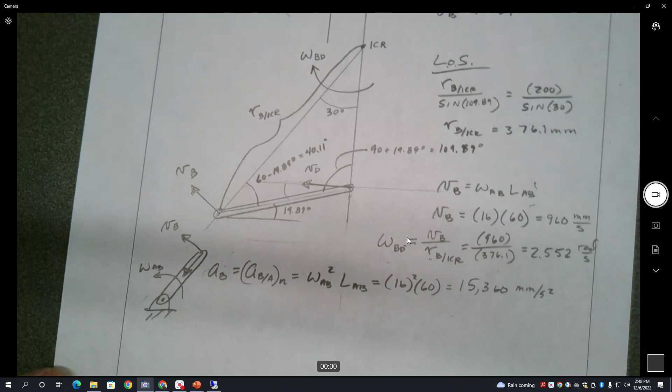So when we go to do the acceleration of this piece here, that right there is going to be 60 degrees. It's acceleration of B. This acceleration is going to be completely horizontal along that line. Doesn't look horizontal, but let's go through our procedure here.

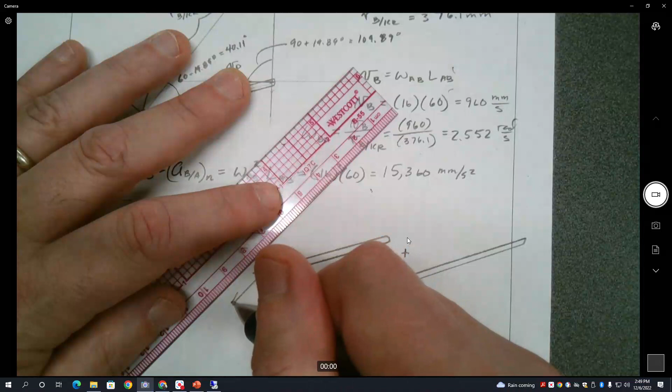We're going to take this and place it in both spots, and then pin it at the spot that's the reference. We have two components to this: the normal component pointing in that direction, and a tangential component, which we know is going to go along that line, but we're not quite sure whether it's up and to the left or down and to the right. Let's go ahead and guess an alpha BD in that direction, so that's that direction right here. That's the acceleration of D with respect to B tangentially, and the acceleration of D with respect to B in the normal direction.

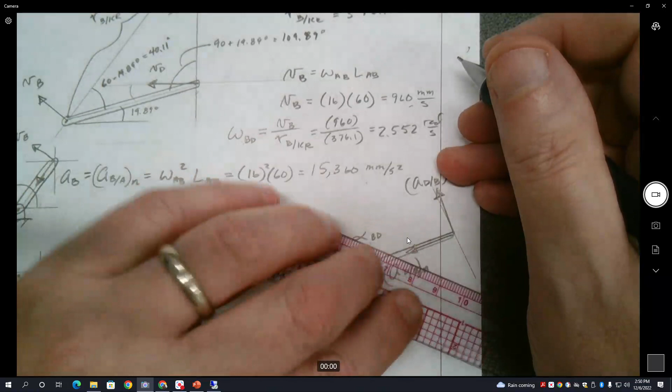Looking at our angles, here is what we had called theta B before. Right here's theta B. If you recall, our strategy most often is to first do the one that we know is going to be 0, because the equation we're writing out for this spot is: the acceleration of D is equal to the acceleration of B as a vector, plus the acceleration of D with respect to B in the normal direction, plus acceleration of D with respect to B in the tangential direction.

So we'll do the y direction first. Say 0 is equal to -- call what we have, that is 60 degrees right here -- so we have negative, I'll just put numbers in, 15,360 times the sine of 60. This guy right here, remember, we could put numbers in here, but I'll just go ahead: omega BD squared times L BD. You can see it's in the negative direction, so minus 2.552 squared times that distance, which is 200.

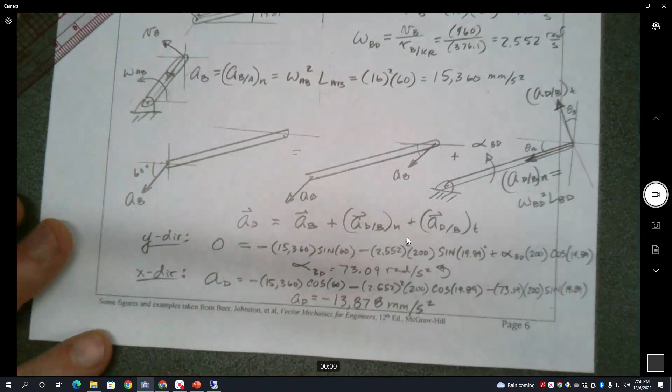Do I have the answer somewhere? I think I do. Oh, always a chance I messed it up somewhere. Always a chance. Yeah, I got the same thing, 13.88 meters per second squared. Thank goodness, how embarrassing if I would get the wrong thing. It's happened before.

I am so tired. And yet I have so much more work to do. I have to go to a meeting today. I have to make the final before I can go home today, after my meeting. Think I could bow out of the meeting? Yeah, so you gotta make it done.

If we need any help finding the answers of the final, I can double check. Sometimes I Google them: dynamics final exam, and I try to find other people's final exams. Let's do that. Dynamics final exam, do the third link, we'll all study that one. I gotta tell you, you won't be happy. I might be biased, but I think my problems are better. My friend's Penn State dynamics course makes ours look like a different language. His is so easy. I help him with all of his work, it's a breeze.